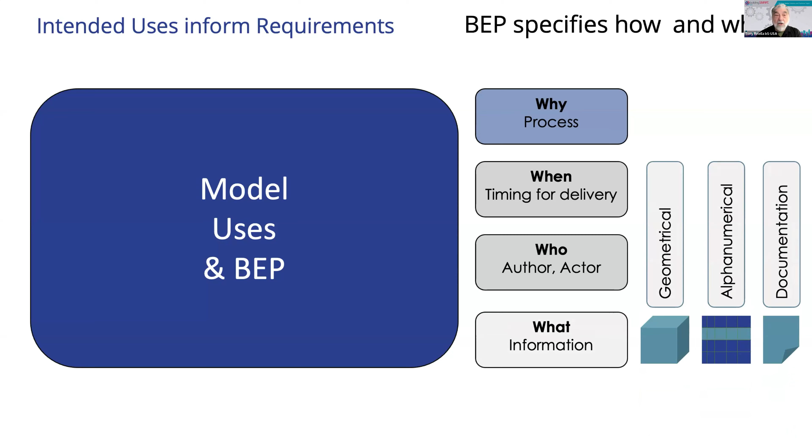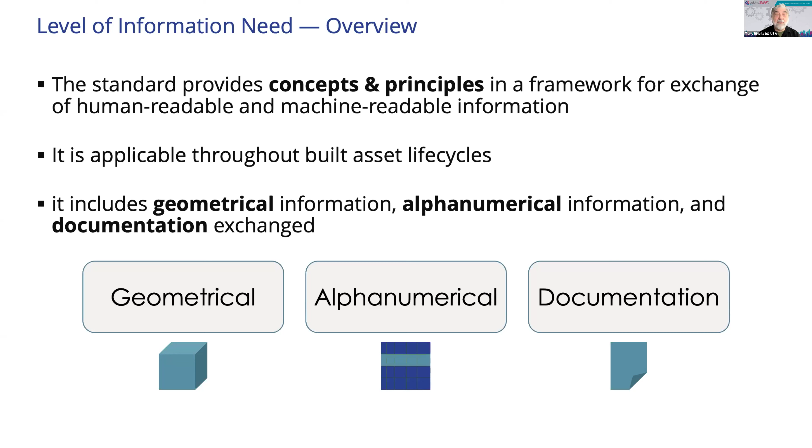The level of information need standard will help us understand what information is required in three basic categories: the geometry, the alphanumeric data, and the documentation that goes along with these. Let's jump into the descriptions that are provided. First of all, as we've said, the standard gives us concepts and principles. That is, what should we be thinking about when we're developing these information requirements? And what are the contents in these three different categories of information? We can take some examples.

So for geometry, we're likely talking about the detail, that is, the complexity of the information. Is it diagrammatic or is it representational? Am I looking at some sort of structural diagram, or do I want to see exact placement, or do I want to do some kind of rendering? The dimensionality, which is not only the shape and size, but also the location point. How am I placing that in the model? And the location. Is it going to be an absolute coordinate with regard to the overall asset coordinate system, or is it going to be relative to some other object?

What will the appearance be like? Is it symbolic, just a little icon that I find in a model or on a drawing? Or is it going to be realistic, something I'll recognize as a window or some kind of valve unit? And then will it have any parametric behavior, either because of where it exists in the built asset or because of something that might be an interaction with the objects around it?

In terms of the alphanumeric data, this will include certainly a position within a breakdown structure like Uniformat, and Jim will tell us a lot more about that. But in addition, there are the other sorts of properties we often think of as being associated with a building information model object, like its required properties. It might have a specific fire rating, or we might need to know the make and model of a piece of equipment.

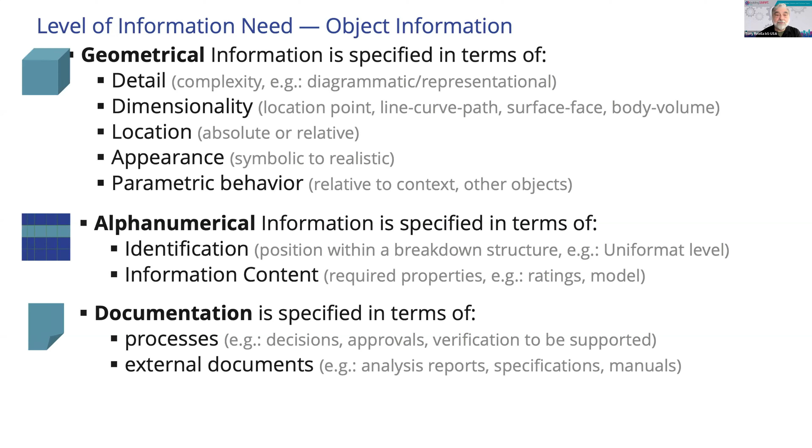So let's look at a quick example of how this might unfold in a real world project. In terms of why, let's say, for example, we're doing a structural analysis, and when would be probably several design analysis iterations that will happen at design review milestones. Who? Let's hope the structural engineer is engaged in this process. And then what? Well, for example, if we're looking at a beam, we might understand that all that's required to do the structural analysis is a diagrammatic representation.

In early days, that might be a 1D representation, just a note, or eventually we might want to have a 3D representation of the element, probably located absolutely in the project coordinate system. We'll want to identify the type of beam that we have, any attributes and performance characteristics that go along with that, and of course, we'll want to attach a structural analysis report.

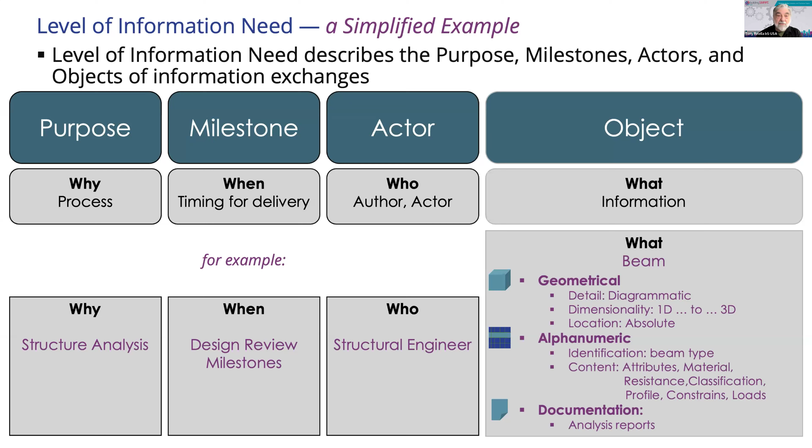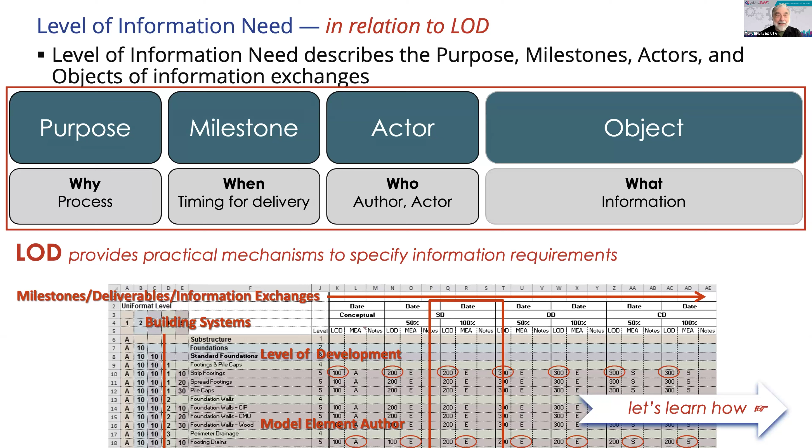All this makes sense from a procedural point of view, but then how do we actually accomplish all this? This is where our LOD comes into play. It provides practical mechanisms to specify the information we need. We can do it in a tabular format, and let's learn how that all comes together. And Jim, would you like to come on and take us through the rest of the explanation of LOD?

Sure. Let me see if I can get everything turned on here. All those buttons, yes. Yes, the buttons.

So, Jim, we are about to see presentation mode. We're still, there we go. Okay. Hey, great. Thanks, Jim. Take it away. Thanks, Tony.

Tony did a pretty good introduction. I don't have much to add to that, except that a thread throughout my career has been interdisciplinary collaboration. And originally, I started working on this, the LOD framework, as a language to help collaborate around models.

So the way the framework works is, first of all, elements and systems go through the design process at different rates, right? Usually the structure leads everything, things like interior casework and finishes bring up the tail end, but they all tend to hit certain common milestones. We probably start out with a concept that might be just a cost attached to a massing model. Next step is usually generic placeholders.

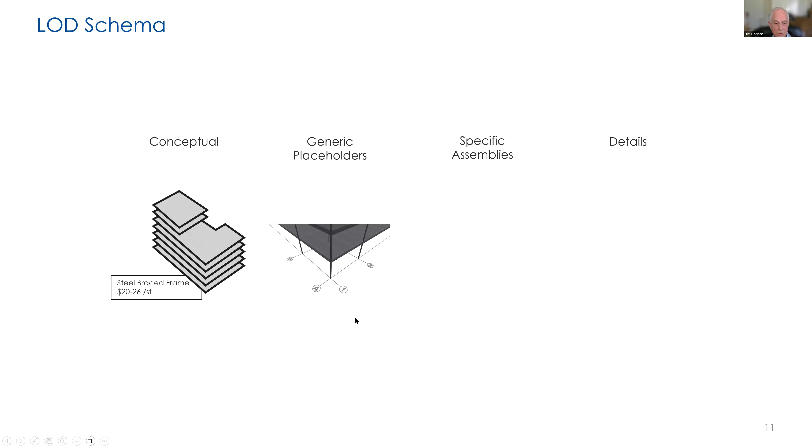We might have the floor in as a deck where the thickness is determined by some sort of rule of thumb based on the loads and the spans. We'll then get to specific assemblies, which are the actual members that we want in the building. And then we'll take some of them to details. As example, where the specs call for a shop drawing, we might take it to that level.

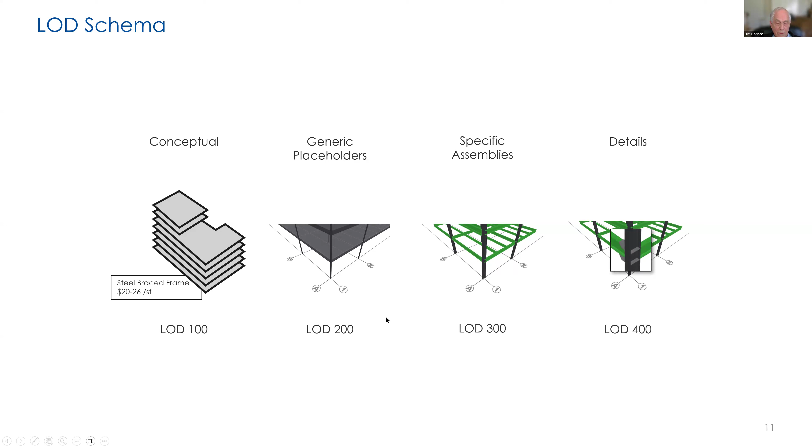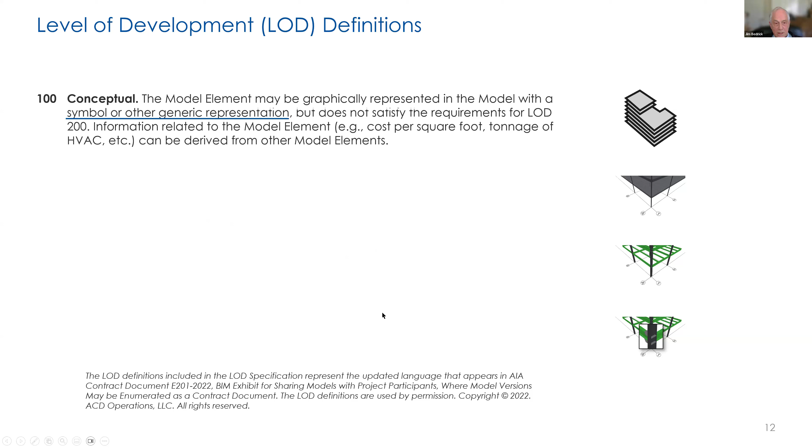So we labeled these LOD 100 through 400, and the AIA Documents Committee came up with some definitions. Now, these have been through a couple of updates. This is the latest series of definitions. We have 100, which is conceptual, and it's often represented with a symbol or some other generic representation. It doesn't have to be recognizable geometry.

200 then is generic placeholders. And for 200, it is recognizable geometry, and it's approximate, though. Everything there is approximate and can't be relied on for anything more. 300 then is accurate assemblies, and this means that model element, if it's at LOD 300, it can be measured directly from the model rather than relying on stated dimensions or callouts.

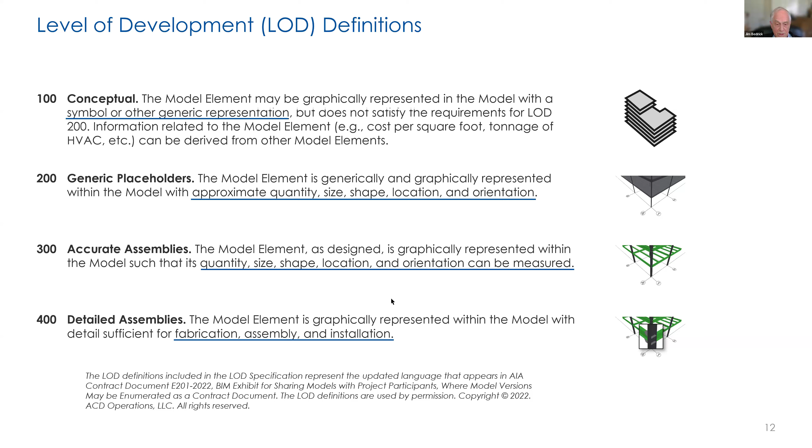And 400 then is the detailed assembly. It's for fabrication, assembly, and installation. And very little in a model will ever get to 400. This is only for basically those particular places where you need shop drawings.

So to get back to what Tony was talking about in the level of information need, for the geometry, we need detail, dimensionality, location, and appearance, right? So at 100, there's no detail. At 200, it's low, everything's approximate. It's high detail at 300, and then we get to very complex detail at 400. For the dimensionality, there's none at 100, and then everything's approximate at 200. It's accurate at 300 and 400.

The location, usually an LOD 100 object will be relative. You could have a symbol located absolutely, but it's probably not reliable. At 200, it might be relative or absolute, depending on what stage you're in the design. At 300, it's going to be absolute. The location is stated in the definition to be accurate, so it needs to be located absolutely. And 400, of course, is absolute as well.

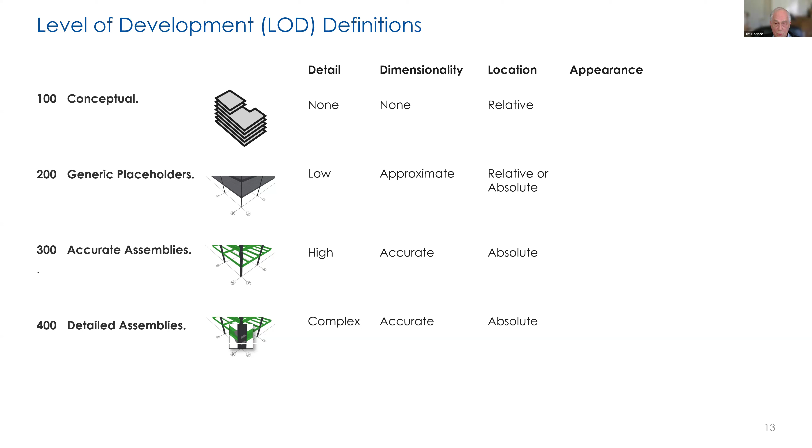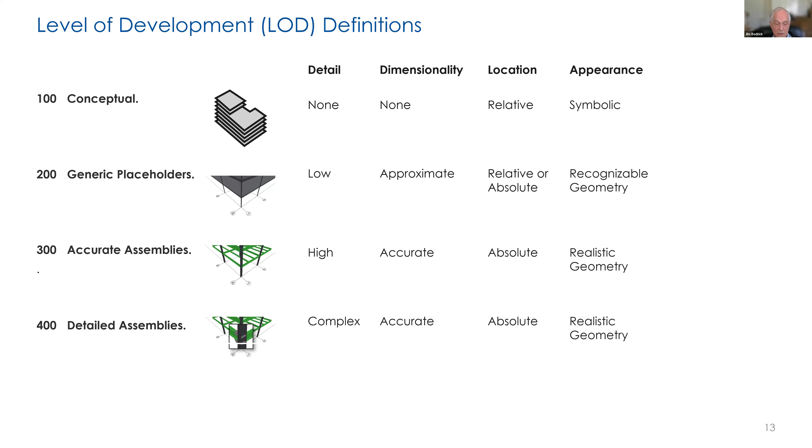The appearance, again, 100 is symbolic. 200 is really recognizable geometry. I need to be able to tell whether it's a beam or a floor. And then 300 is realistic geometry, as is 400. So the thing is, we are talking about level of development rather than level of detail. And there's a very important distinction.

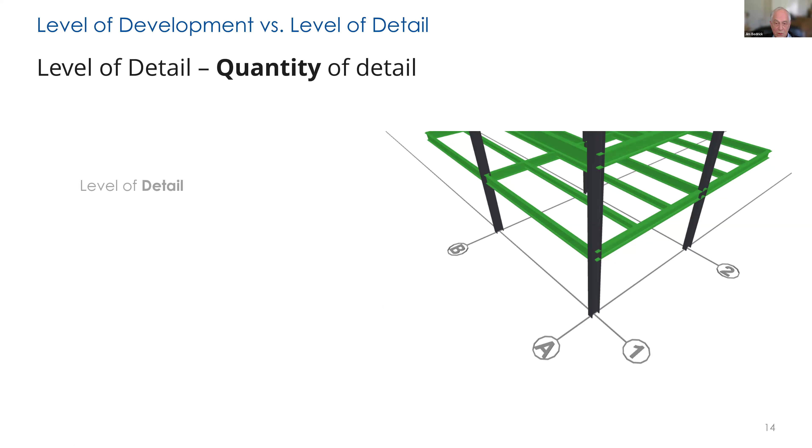Level of detail is really the quantity of detail. So if we look at this structure on the right, the level of detail is pretty high. It looks like specific steel shapes. It probably is, because I probably took them from a library, and I can measure the locations of those precisely, but should I? I mean, have the shapes been engineered? Have they been located in their final location? We can't tell by looking at the model.

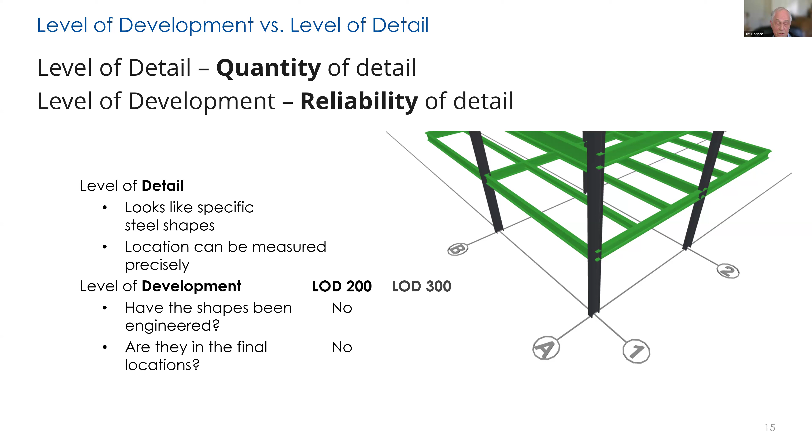Okay? This is where level of development comes in. Level of development is the reliability of the detail. So it answers these last two questions. At LOD 200, no, they have not been engineered and they are not in the final locations. At LOD 300, the answer to both is yes. So at LOD 200, it's approximate, 300 is accurate, but you cannot tell by looking at the model. You have to know what the LOD is.

So these definitions were all well and good, but we found that in practical application, they were pretty widely interpreted. So what I think of as an LOD 200 door might be something different than what you think. So we got a group together in the BIMForum and came up with this LOD specification where we interpreted various building systems at various LODs.

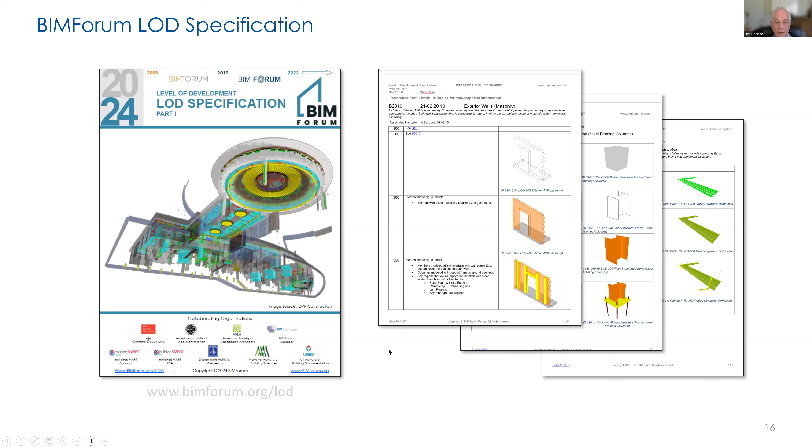And this becomes a dictionary where you can look: if I want to know what a column base looks like, I can look it up in here, and here it is at 300 and 350, okay? And this is available free of charge at bimforum.org/LOD.

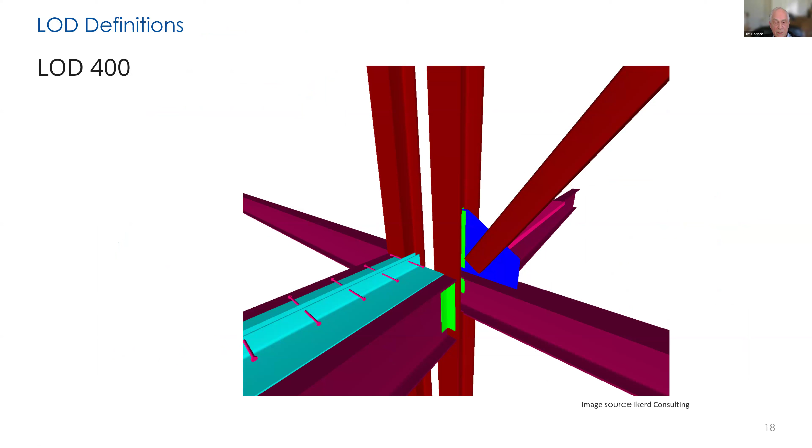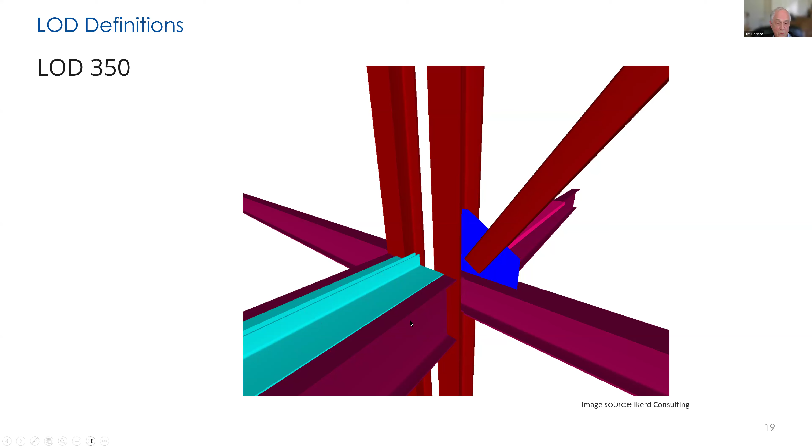So we came up with this LOD 350, which would look something like this, and slipped it in here between 300 and 400. And here we're saying that it's pretty much the same as 300, except its quantity, size, shape, and location and interfaces with adjacent or dependent model elements can be measured. So, for example, a slab edge at 300 would be accurate in thickness and location. At 350, it would have the embeds for the attachment of the curtain wall.

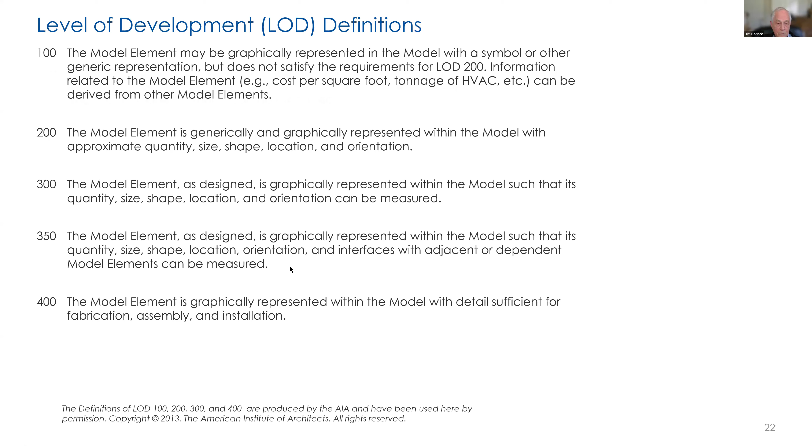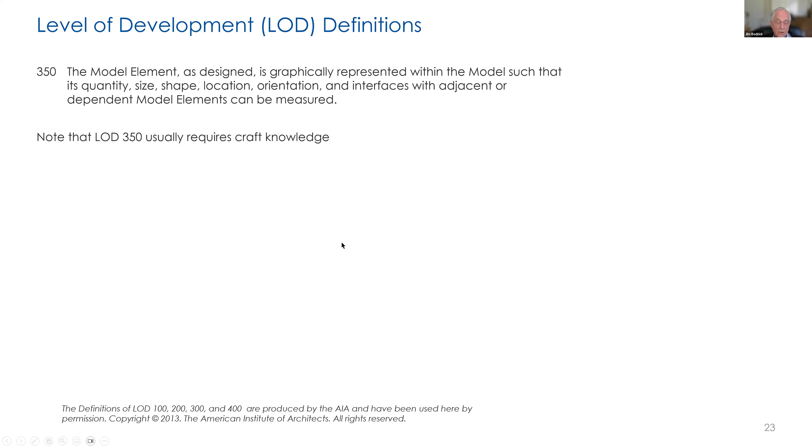It's important to note that 350 is kind of a breaking point. We intentionally stayed away from embedding who did the modeling in the LODs because most of them can be modeled by everyone. 350, though, usually requires craft knowledge. So 350 is usually going to be done by the subcontractors, and the designers will usually not go beyond 300.

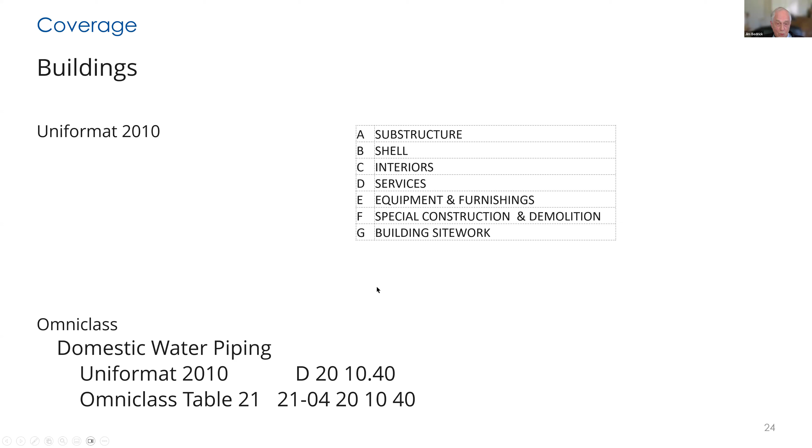So the coverage is buildings currently, vertical construction. We're in the process of extending it to horizontal, but that's underway. We use Uniformat 2010, which divides the building up into 7 locations, okay? We also use OmniClass, which is a one-to-one correspondent with Uniformat 2010. They're both published by the Construction Specifications Institute. OmniClass, though, is a more internationally accepted version, so we use them both.

Now, why are we using Uniformat rather than MasterFormat, which is the format that everyone is much more familiar with, where we break down specifications? The problem with MasterFormat is that it is trade-based. So we have all the trades impinging on this exterior wall. But if you have a model element that is the whole exterior wall, what are you going to call it? What number are you going to put to it? There really isn't an answer.

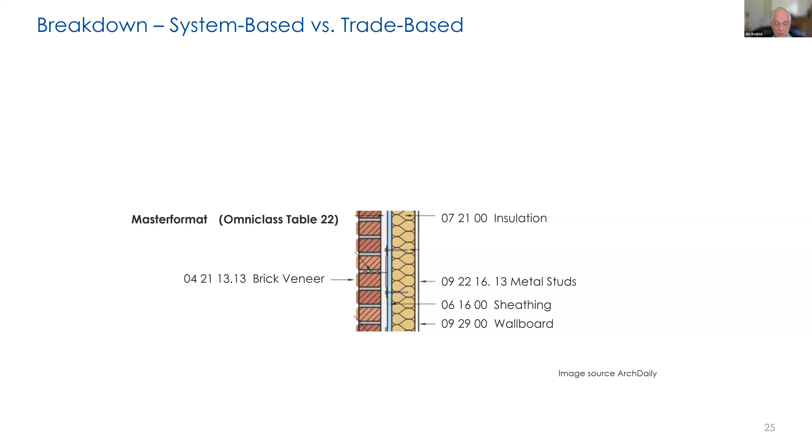And also at the beginning of the project, you're probably not going to know that it's brick veneer. It might be EIFS, it might be metal cladding, whatever. Okay, so we don't know, and we need some designation that tells us what it is without knowing exactly how it's going to be built. So the Uniformat puts that whole wall as one number, B2010. Okay, so if you've got a wall that is one element in your model, you can label it B2010, or you can break it down into 3 layers.

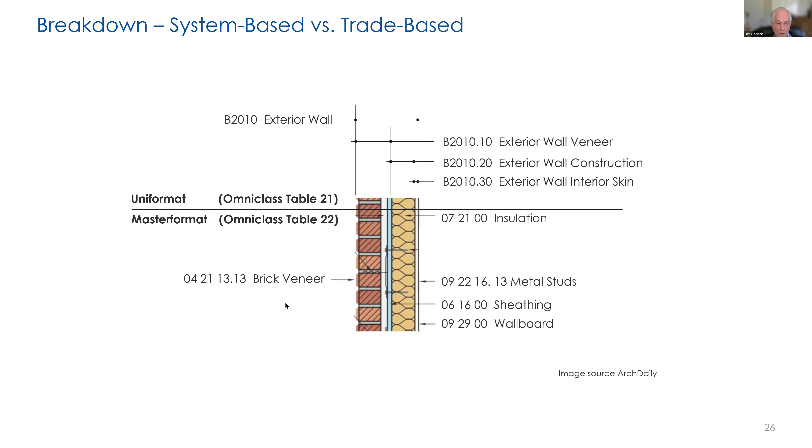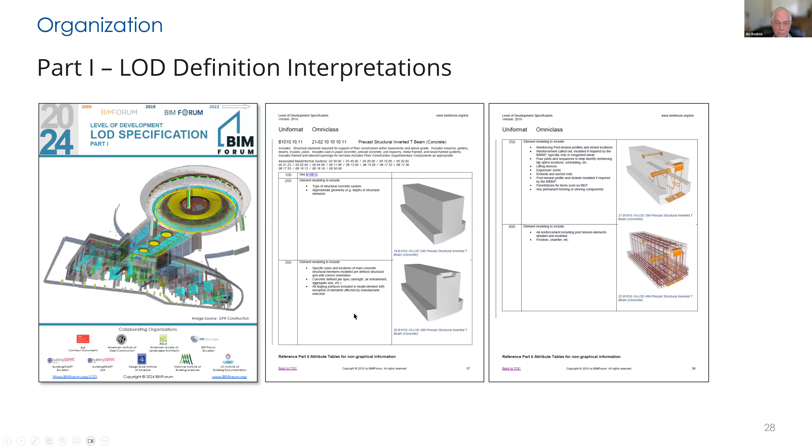So a little bit about the creation process, just to show how we got this well accepted across the industry. We begin with domain experts, and these are people from a particular discipline. And we always make sure that we have a designer and a builder on each domain expert group. They come up with the first draft of the definitions or the interpretations. And then it goes to the core group, which is basically the co-chairs of all the domain expert groups, and it includes a designer and a builder from each discipline.

So we go round and round and revise them until everyone can agree on it. And then the first time we publish it, we put it out for public comment. And then we get the comments back, and we will send them back through the process to revise anything that needs it. And it might go all the way back to the domain experts. Once that's revised, then we publish the final version.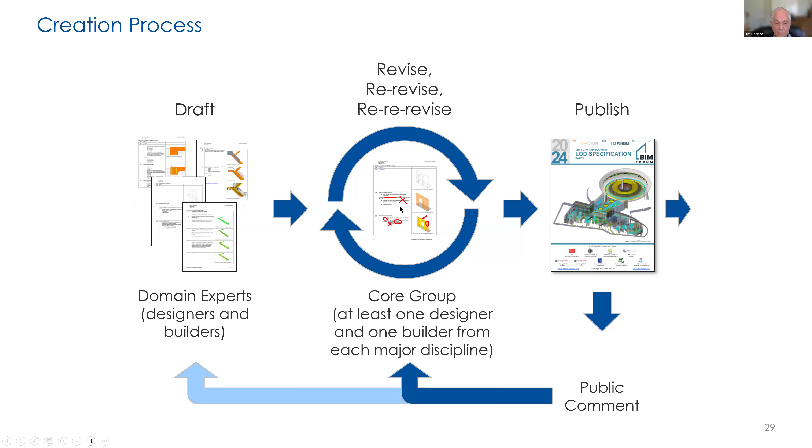So basically, at this point the first draft satisfies the domain experts, and here, as we revise it, we get it to where it satisfies everyone across the industry. Now, it's published annually. We add new content each year, but all the versions are kept available at bimforum.org/LOD.

So if a project starts up, say in 2019, signs up to the 2019 LOD spec, attaches it to the BIM execution plan or the contract, then when 2020 comes along, they have the choice of updating to 2020, or they can stick with 2019 if they want, because they know that's always available to everyone.

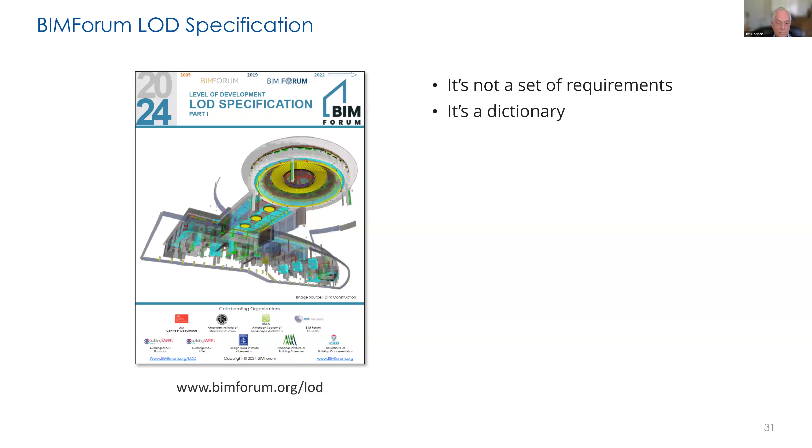Now, it's important to note a couple of key points about this. One, this is not a set of requirements. The LOD spec doesn't say, for instance, what LODs are in a design development deliverable and so on. It's really a dictionary. These are words, okay? And the user writes the story using these words. Okay, so how do you write that story? So that's part two, this model development spec template.

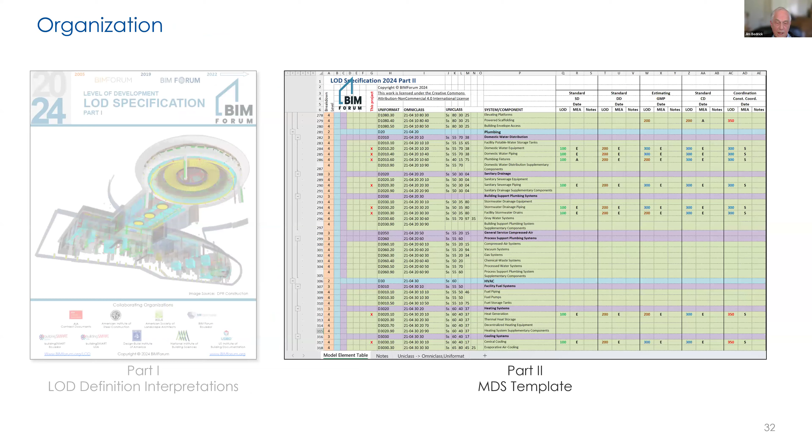Okay, so when we're dealing with models, we know that they grow from a conceptual up to a very detailed model. And we hit certain milestones along the way, probably something like concept, SD, DD, and CD. And we also have a bunch of other models or model uses. There may be design reviews, there may be cost checks, we may be using them for simulation like structure and energy, and then we might have some deliverables at the end of the project for the owner to use in asset management.

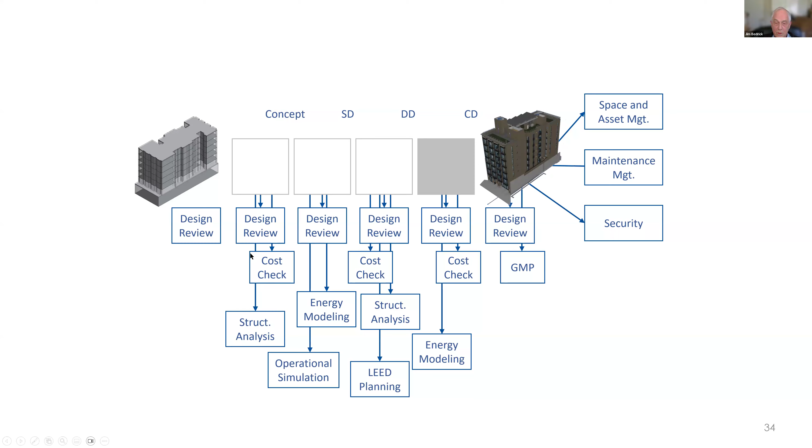So this template is laid out like this. The building systems are in the rows, laid out by Uniformat 2010. The milestones, deliverables, information exchanges, and so on are in the columns. So each set of 3 columns defines a specific model. Now, each model will have a level of development, and it'll also have a model element author. That's the who. Okay. And it also has a column for notes, because we couldn't get everything defined across the board. So there are ways to put in specific notes.

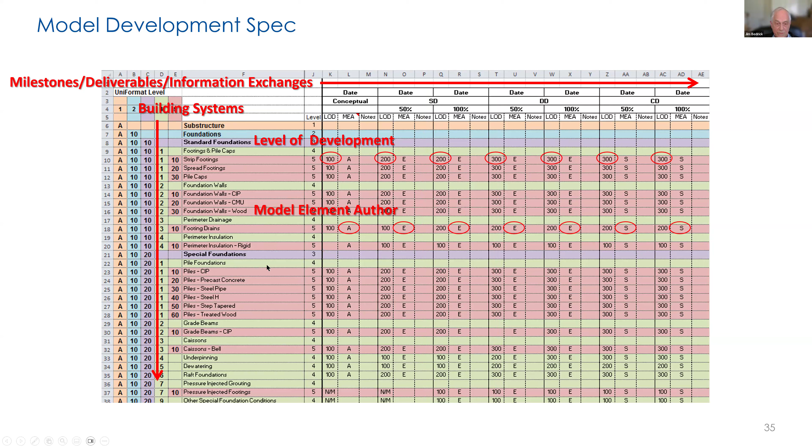Now we'll get into the definition of this model element author in a minute here. But meanwhile, some of the terms that are used in this model development spec are, first of all, BIM uses. Most of you are probably familiar with that. And the BIM uses will have milestones within that use where we need to exchange certain information. So these milestones can also be defined through this process. We have specific milestones. There are standard milestones, SD, DD, and CD, and we can also define interim milestones such as 50% schematic, as we're seeing here.

Then there are BIM use or information exchange milestones, which we just talked about. Here's a milestone for the coordination. And this is the LOD profile that you need in order to be able to use that model for coordination.

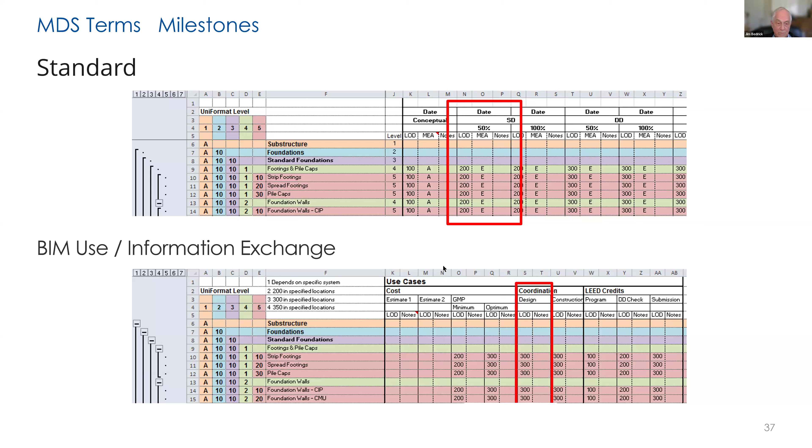Now, the model element author that we talked about is the person or the entity that is responsible for modeling the element, not necessarily the one who is responsible for designing it. Who's responsible for the design is still defined by state licensing laws. Okay. An example of this might be early on when we were starting to do MEP coordination. The trade contractors were modeling things and the engineers weren't. So basically the trade contractor became the model element author, but the design engineer was still responsible for the design.

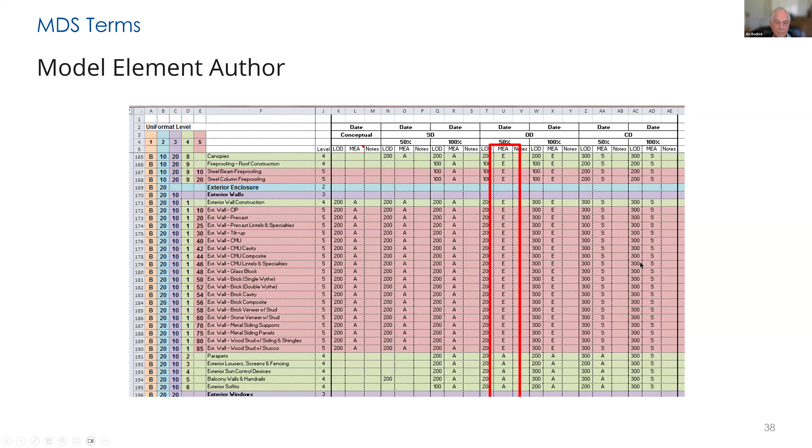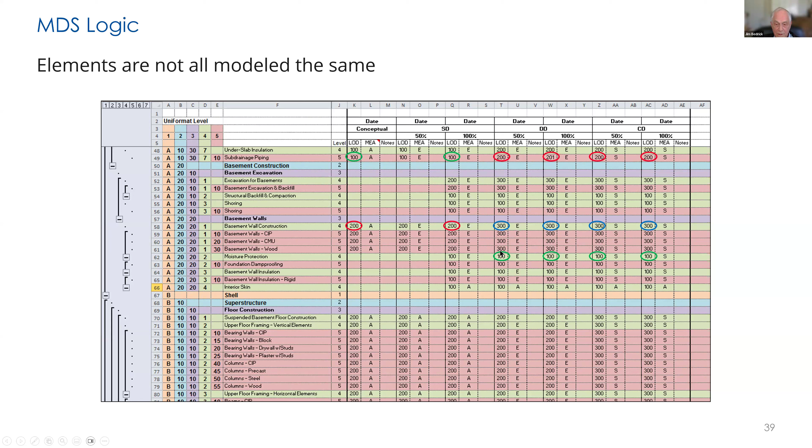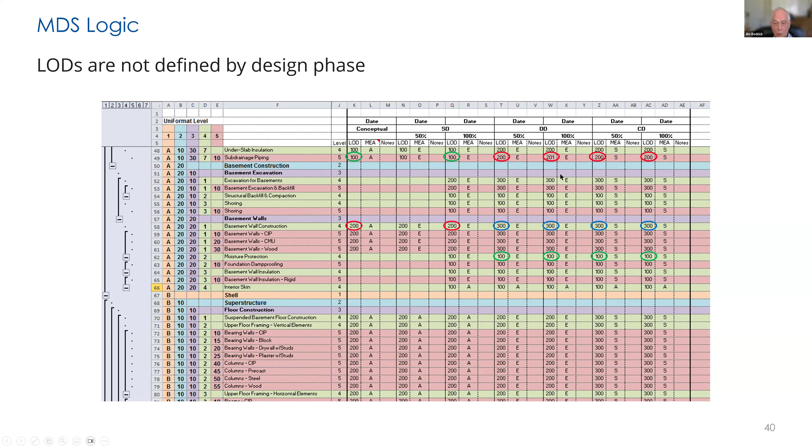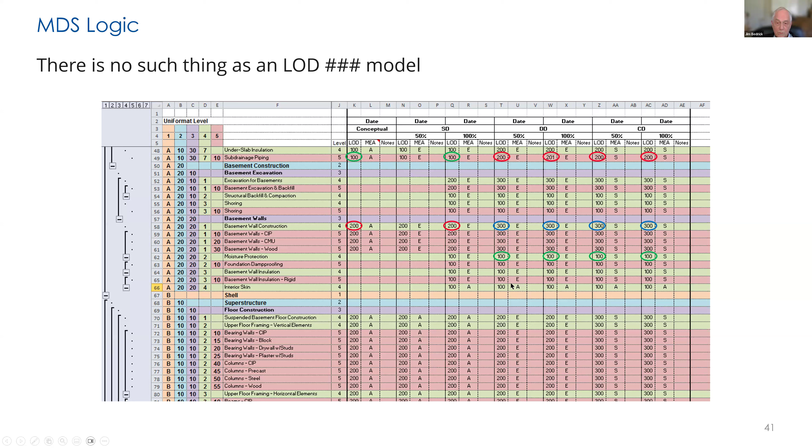So some logic. Elements aren't all modeled the same. Okay, you see in any model, you'll have a spread of LODs. And the LODs are not defined by design phase. Okay, 100, for example, doesn't mean SD, 200 DD, and so on. Rather, the design phases are defined by an LOD profile. So at 100% DD, you will have elements at these LODs. By that same logic, there's no such thing as, for example, an LOD 300 model. You'll see in any of these models, there are a range of LODs.

Okay. Now, LOD also is not a value judgment. 300 is not necessarily better than 200. Okay. Sometimes if we're in a design-bid-build project, for example, we want to leave that LOD at 200, so the selection is up to the contractor so they can get the best deal. And in that case, 200 is better than 300.

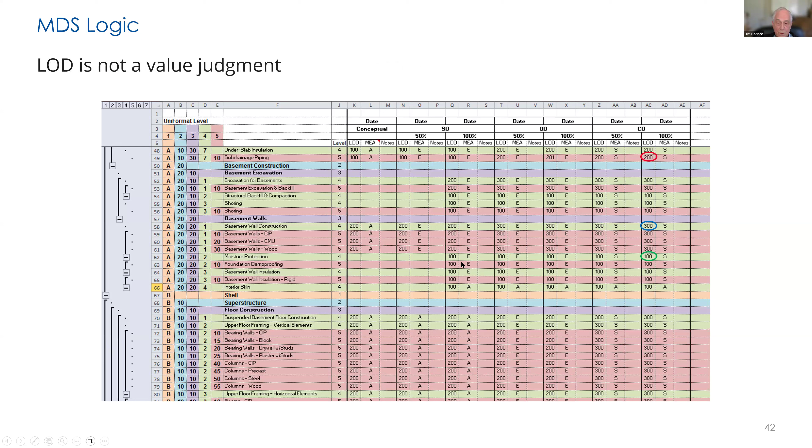LOD does not indicate who authors the element. Here you can see a 200 authored by the architect, one by the engineer, and one by the subcontractor. That said, remember what we talked about with LOD 350 - that usually requires craft knowledge, but we don't state that requirement here. If the architect has a trade contractor on board, they might be modeling it at 350.

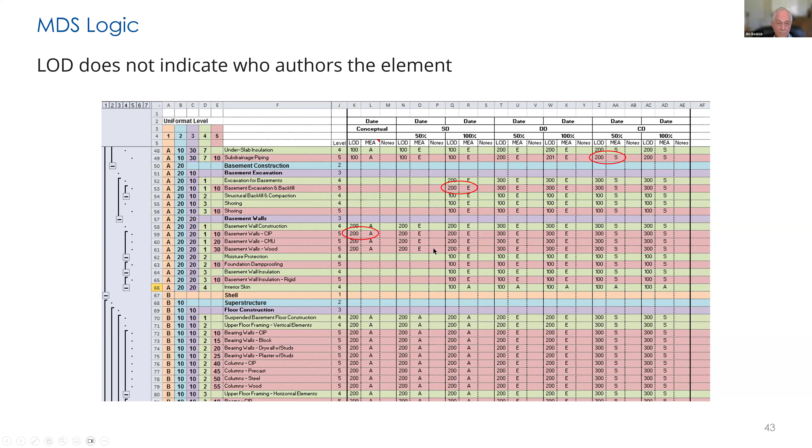So what's it good for? In general, this framework defines deliverables, milestones, and information exchanges. It defines models specifically for these purposes, and it also enables reliance, because now we can tell what elements are accurate and what are just placeholders.

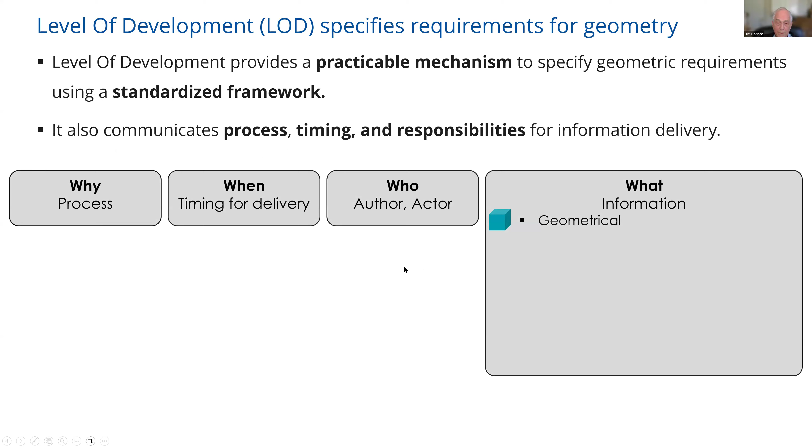Tony showed this diagram earlier - if you look at the model element table, the model development spec, whatever it's called in the project, you'll see that the why, the process, is indicated right here. We have some standard milestones - here we have structural analysis, here we have the GMP cost estimate, and so on. So that's the why.

The when is stated by a date, when that particular model is going to be delivered. The who, of course, is the model element author. And then the what is the level of detail number, level of development number, for that particular element.

Most of the objections I have seen to the LOD framework say that it doesn't address these things. I think they seem to come from people who have only looked at part one and have not looked at how it's actually used.

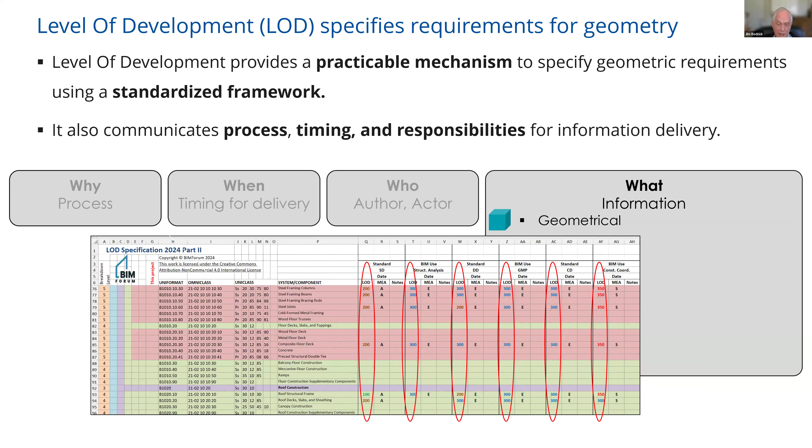One way this is used is in a collaborative work plan. We start by setting out a baseline - a lot of architects or engineers will define what they mean, for instance, by SD, DD, or CD. That's their baseline, that's business as usual. Then they may tweak that for a specific project, and independent of that, they will define what they need for specific BIM uses.

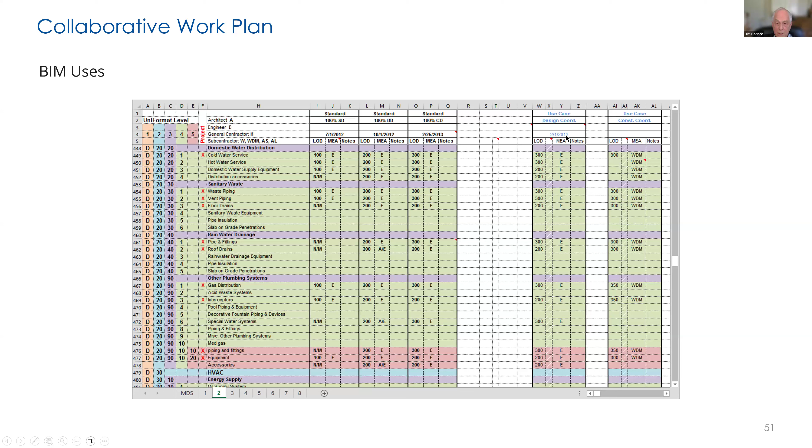For design, here's design construction, design coordination, and construction level coordination - these are the LODs needed on these elements for these exchanges. So then we can look at where these fit into the overall design process. For example, we're saying that we need the design coordination done by February 1st.

So if we sort this by date, it comes in here, and we can see that the LODs necessary for the design coordination are not there at the completion of DD. So then if we look at when they are, we have to move it out to here, but then we're getting it later than we wanted it.

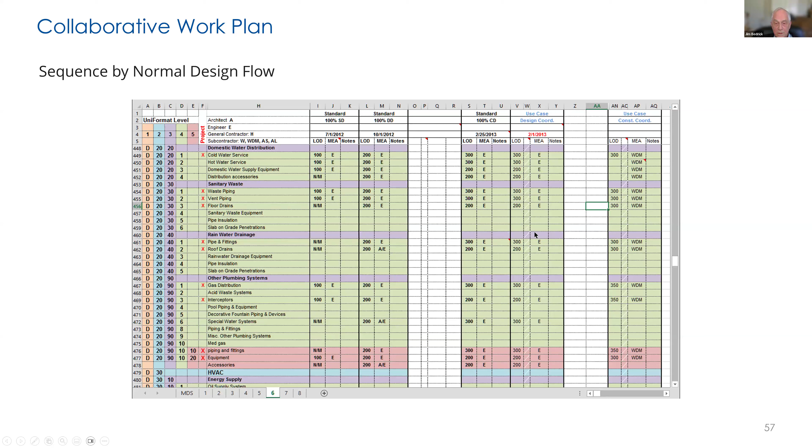So the point is that we have a choice here. We've got all the information we need to make that choice - whether we're going to leave it here and accelerate the design of some of the elements, or take it out here and accept a later date.

Then if we look at the construction coordination level, we see that we need some additional modeling. A lot of these elements - remember, the designers usually don't go beyond 300. The trade contractors will often need 350. So this is where the trade contractors come in and start advancing this model from a design model to a construction model, and that process is usually taking specific elements from 300 to 350.

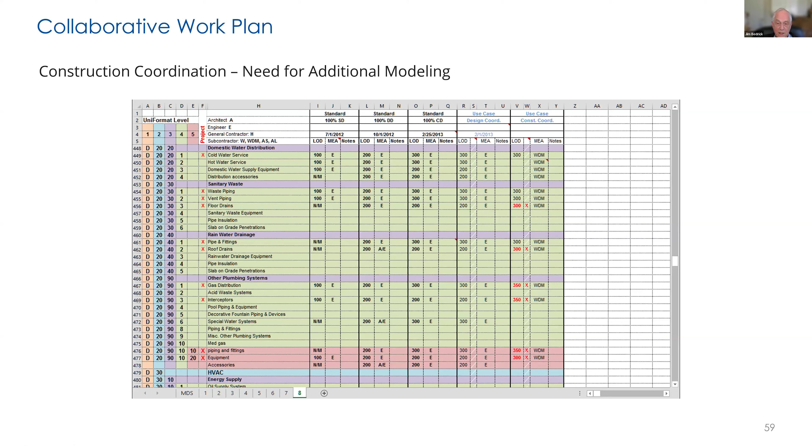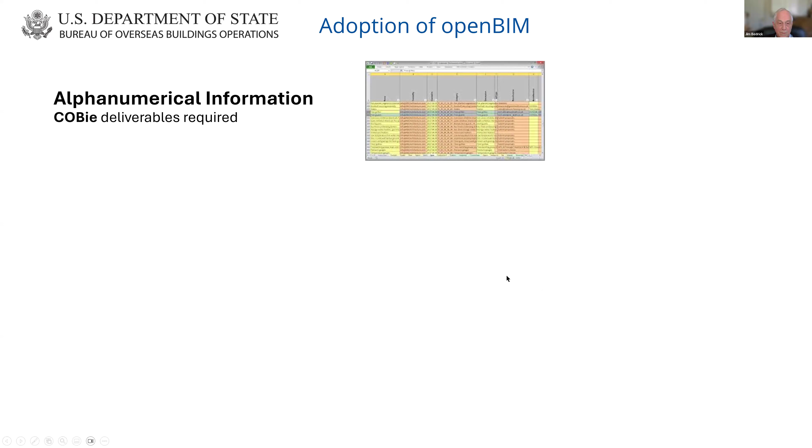So, adoption of OpenBIM - how is this actually being used? The U.S. State Department Bureau of Overseas Buildings Operations, the division that builds the embassies, is in the process of adopting OpenBIM, and so they have their alphanumeric information defined as COBie deliverables.

Then the geometrical information - first of all, the model format has to be IFC as well as native. And then they use the BIMForum LOD framework to define the specifications of the model. They have what they term a minimum modeling and data requirements spreadsheet, where the modeling requirements tab is a customization of the LOD spec part 2.

So they define the design phase completions in this matrix, and this spreadsheet is attached to the contract. So this becomes contractual requirements - that they must deliver models at certain LOD profiles at certain milestones.

It's also able to define the delivery model. They have specific different MMDRs for a design-bid-build project and a design-build bridging project. They're fairly similar, but a little bit different to facilitate that delivery model. And they've also combined it with the U.S. Institute of Building Documentation's level of accuracy specification, to define the scope for reality capture efforts, laser scanning, and so on, for specific use cases.